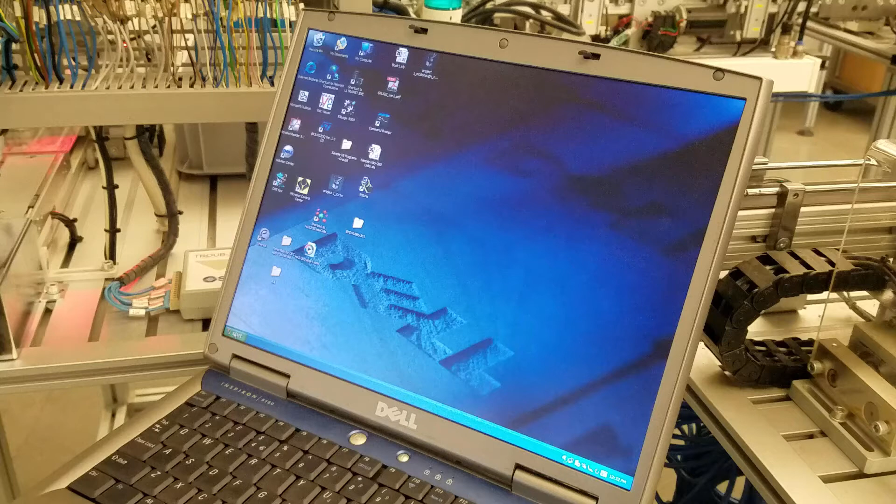Okay, I'm going to demonstrate the SCADA system on the HAS 200. The SCADA application for the HAS 200 is called 3D Supra, so I'm just clicking the link to open it up and click the window.

I have to click this Connect to Hardware link, and it takes a little moment to connect, just to show you what's going on here. Actually, it already connected—sometimes it takes a little longer than that. So you notice we see the 10 stations.

They're actually called tools—Tool 1, Tool 2. That's a term used in manufacturing for any kind of equipment that does a particular task. Very often it's called a tool. So Tool 1 is the box dispenser.

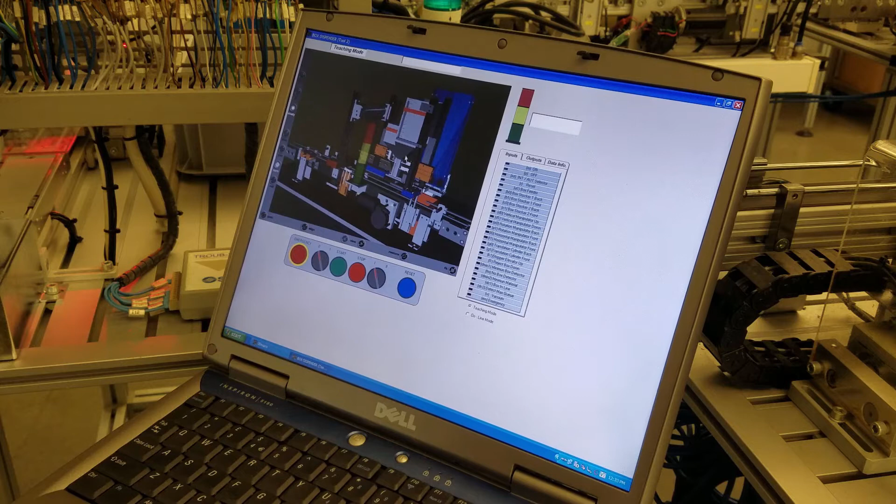So what I'm going to do is open up Tool 2, and what you see is a SolidWorks generated version of the actual filling tool. This is the blue filling station, so what I have to do is click on online mode to tell the software that I'm actually connected online.

It says running, so I've got a virtual version of all the buttons down here. What I'm going to do is minimize the screen—oops. So if I press the green button twice, it should act as if I'm standing at the station pressing the green button.

And if you look carefully at the animation, you're going to see it start moving according to the parts of the system that are actually moving.

So the thing about SCADA is that this could potentially be an application running in a different room, or in a different building, or even a different city. This gives you an idea of how systems can be monitored and controlled remotely through a networked application like this.

So this is actually a fully functional version of the actual system, where you see the inputs and the outputs.

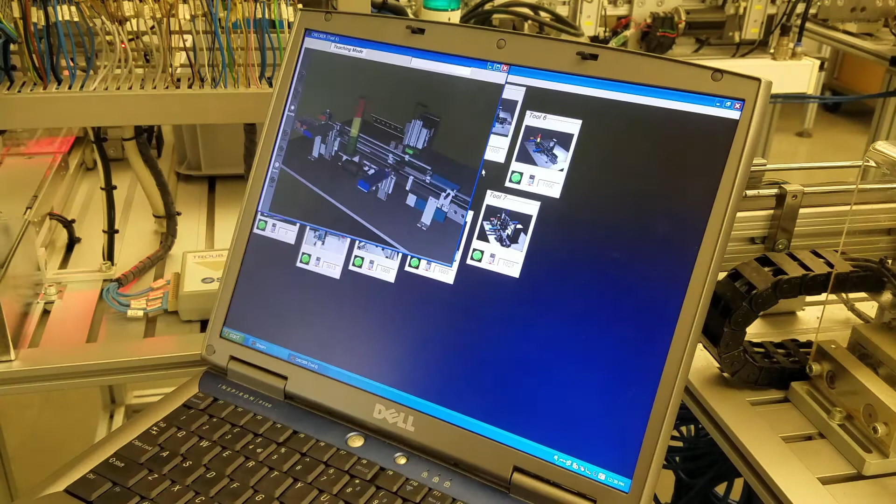Okay, I've got to do the same thing, click online mode, and now we're live connected. So if I hit the start button—remember, this is the station that measures the height of the pellets.

I don't know if you can hear it kicking into action, but it's doing its thing, and you can see the animation reflecting the actual process in terms of the actuators.

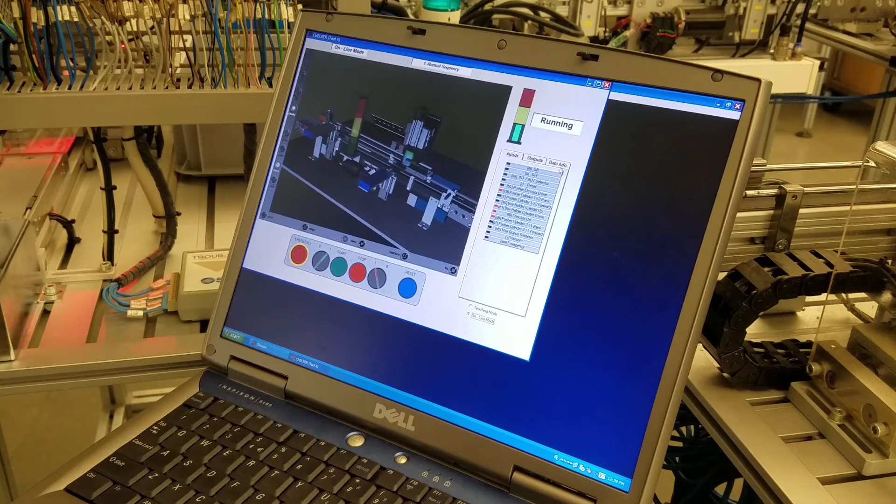And so now we have this window where we can look at data. You notice we've got a box, the barcode reader, the barcode for the box here, 3005. It's the same one I produced just earlier.

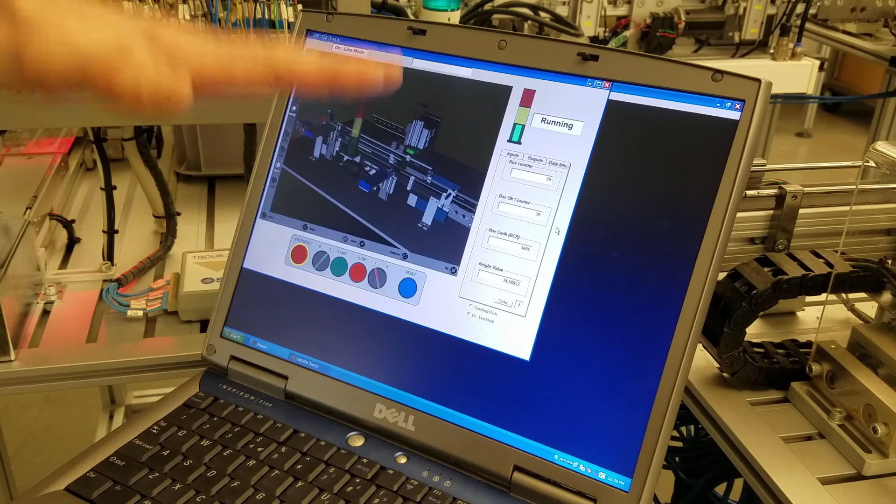And then now we have a height value. Remember, that's the number of millimeters that the plunger travels to measure the height—it comes down till it hits the top of the pellets. So the less pellets in the box, the larger that number is going to be. It's just a raw data value.

So we get some actual information. Now it's waiting at the entrance of station 7, so I'm going to close station 6. Actually, I don't have to close it—maybe I'll just minimize it. I'll open up station 7.

And click online with that one. Okay, and I'll hit the start button. This should put on a cap and a label.

Once again, notice the animation moving according to the way the equipment is actually moving. Cap is on. Label has been picked up.

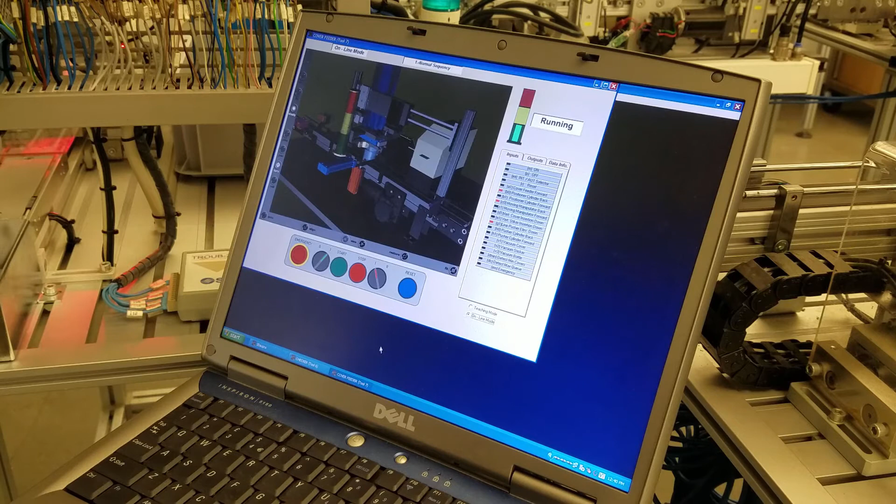Okay, so by watching this animation, we can monitor what's actually going on the real system. All right, let's do one more—let's demonstrate tool 9.

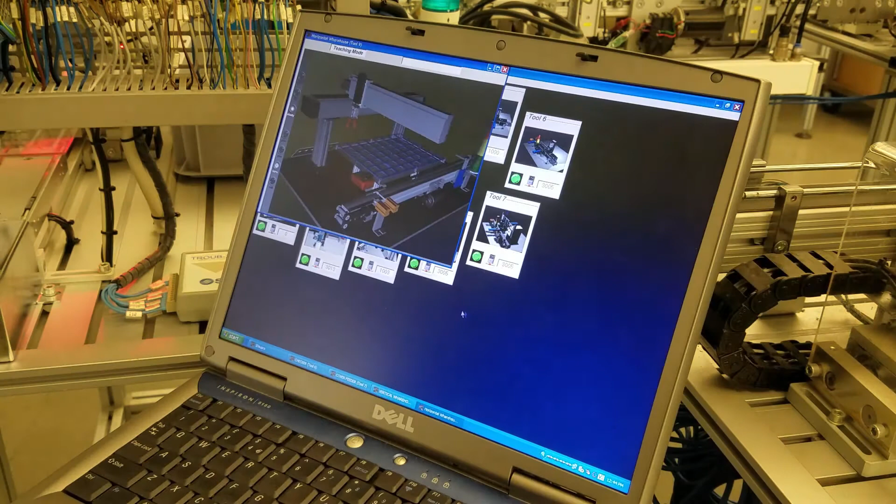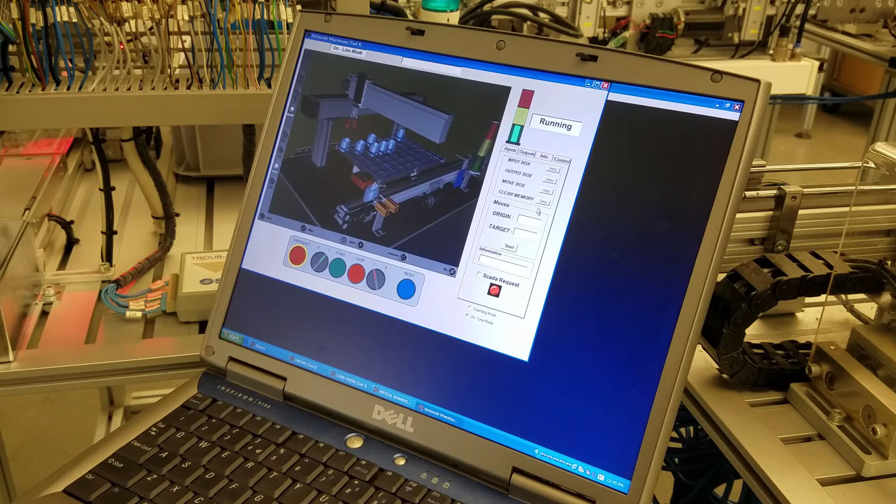Okay, online mode, and you can see we have the same issue here where we must have had a bunch of boxes on there at one time and then manually took them off. So I'm going to do the same thing—I'm going to see if it works from here, if I can clear the memory.

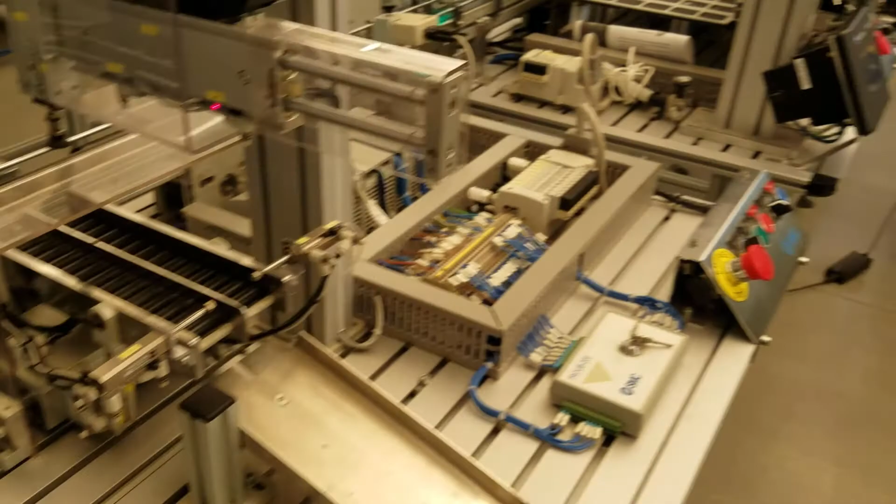Oh, maybe I have to hit start. There it is—so that's what I need to do. I have to just hit the clear memory button and then hit start, and it will clear the memory. So you can see the actual station over here—just quickly, there's the actual physical station.

No boxes. Box waiting to go in. Okay, let's go back over here.

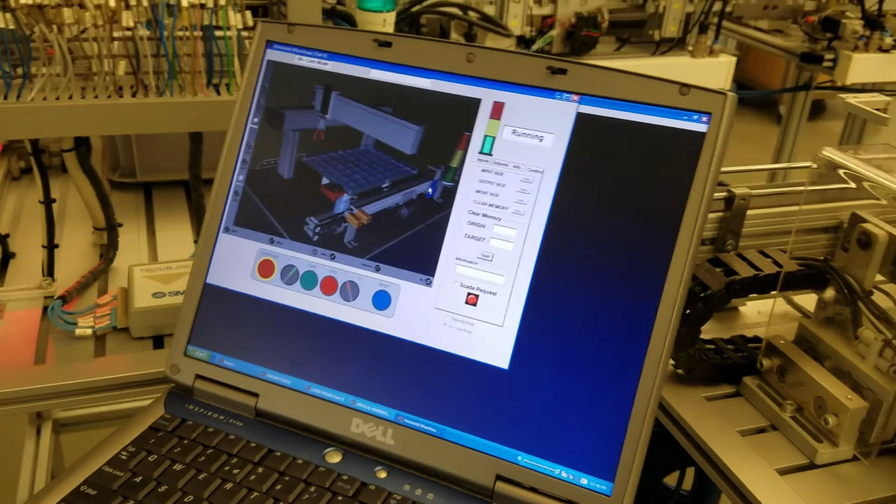And so I'll do an input box, put it into, I don't know, position 25. I have to have this SCADA request checked and hit start. And you can see the animation will start moving around. So it kind of jumps the gun a little bit on putting the virtual box into its little place.

But there it is. And we can do another output to get the box out of that position.

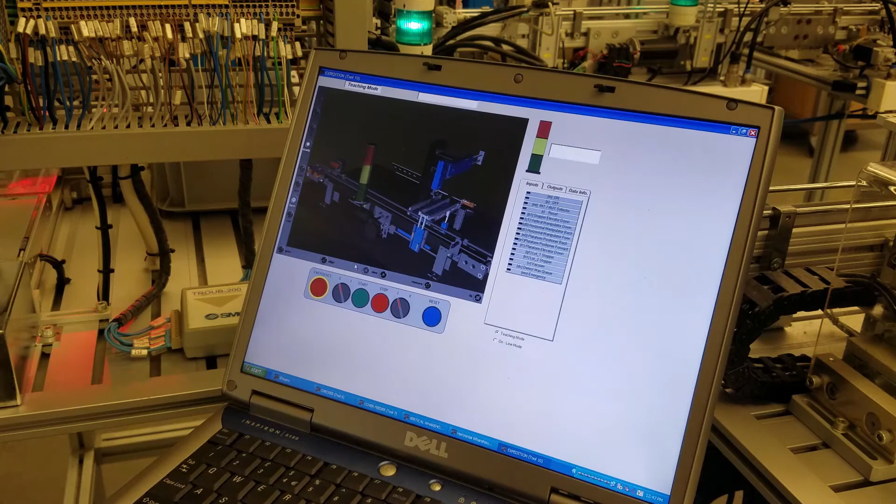Okay, now the last station here I'm going to demonstrate is station 10. And what I think I'll do this time is reposition the camera so you can actually see both the station and the animation working at the same time.

And so we'll do another online mode, and hit the start button. You notice it shows a little box at the input gate.

It knows it's there because there's a sensor—well actually the barcode reader—sensed that there was a box there. And now it's going to be picked up. So you see the animation moving at the same time.

All right, so that is the SCADA system on the HAS 200.